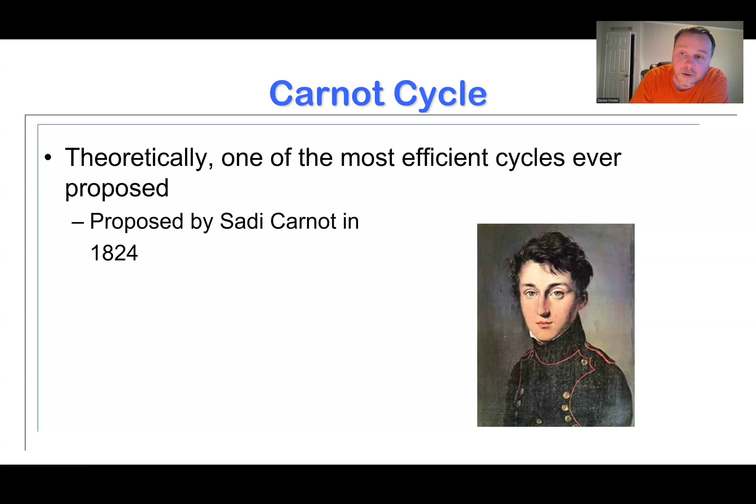I always like to show pictures of some of these individuals—thanks, Wikipedia, this is just a Wikipedia image. The terrible dad joke I always tell in class is I like to show these individuals so that when you're really cranking away at your homework, spending hours—if you're doing this right, not just letting AI or some service do your homework for you, if you're really wrestling with these problems—at some point you should be frustrated, thinking 'why did I choose to be an engineer?' Just don't hate me, I didn't do it, it's this guy, that guy right there, it's his fault, his fault, right? So when he is the source of your ire, not me, okay, I'm just the messenger. That's the guy, that's the guy. If I can get this mirror straight on the camera, I'll show you some of our good forefathers of thermodynamics. This is one of them, this is Nicolas Léonard Sadi Carnot. Let's talk about what he did. Why do we not like this guy?

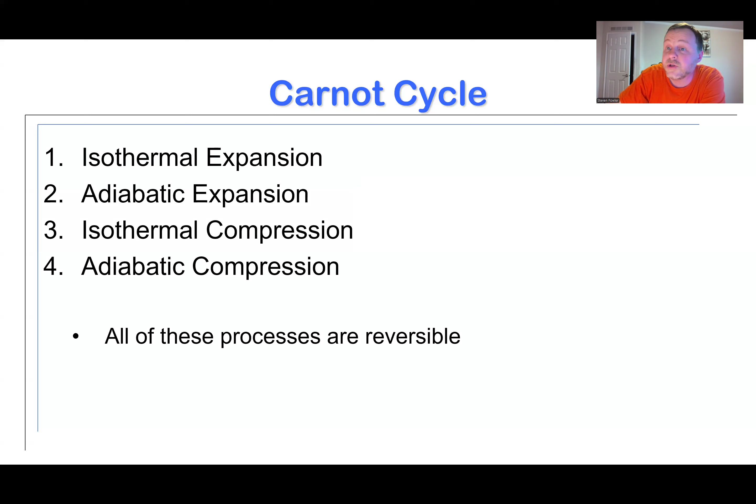Well, what am I going to do here? I'm going to talk about and show these processes graphically on a PV diagram in just a second. I guess I could draw it here, I'm going to just draw this on paper. Okay, so I'm going to stop sharing here and change video.

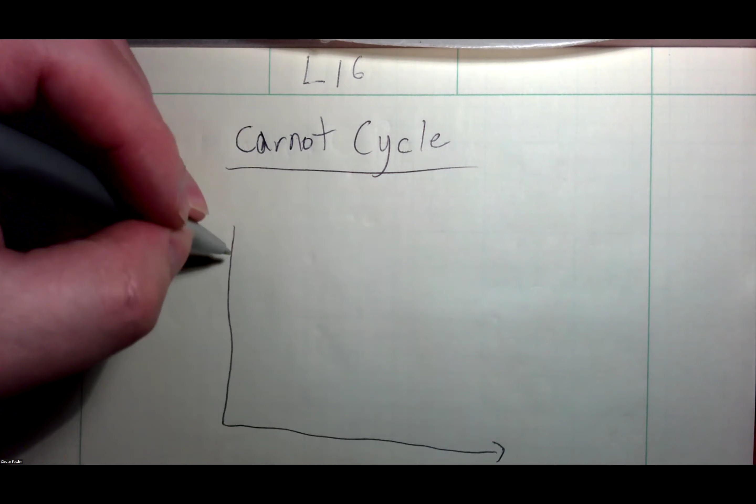Remember, before I stopped sharing screen, I said there are these four processes—I showed you the four processes for the Carnot cycle. Carnot proposed this process, and if we plot these on a PV diagram, pressure versus volume, he starts out with an isothermal expansion.

So we're going to go from a small volume at state one to a larger volume at state two.

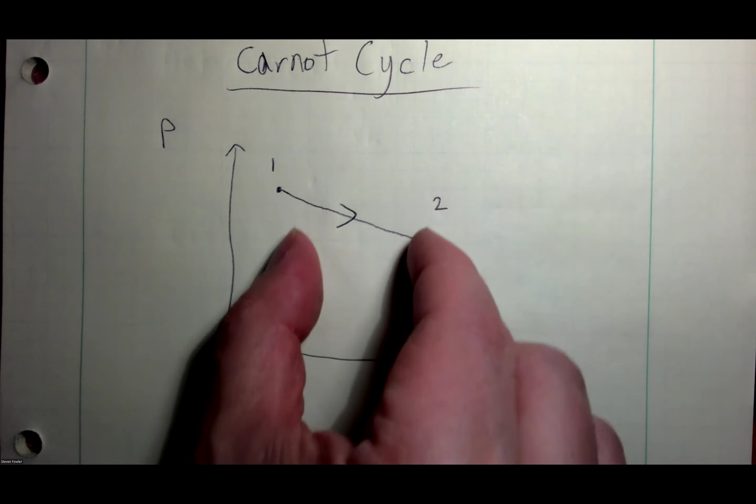Now, in class, I would stop and ask: what does this area under here represent? Who can tell me what this area under a PV curve represents? And people would say, well, that's potential work—that's the potential work we could get out of the system, right? Yes, that is potentially the work we could get out of this cycle.

Now, this process is isothermal expansion—isothermal meaning constant temperature—and that's occurring at a high temperature. So, a line of constant high temperature going across.

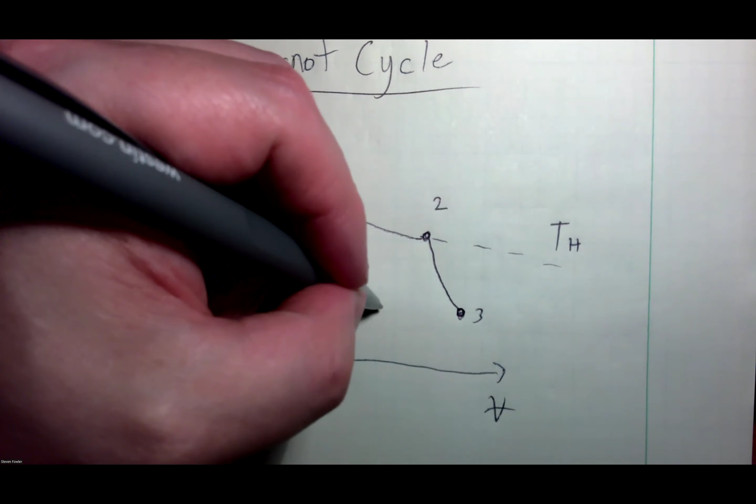And then after isothermal expansion, we go through another expansion—this would be adiabatic expansion. So if I basically supply enough heat to keep the temperature constant, but then stop supplying heat to get down here to state three, this process is going to end up going down to a line of lower temperature.

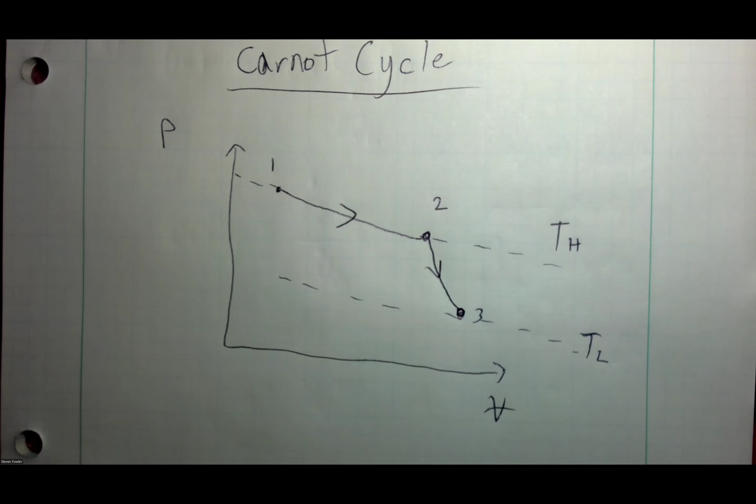And now, if I were in class, I guess I could do it here, I would do this on the board where I could erase these things. I'm going to do these in green—these lines are going to be all in green.

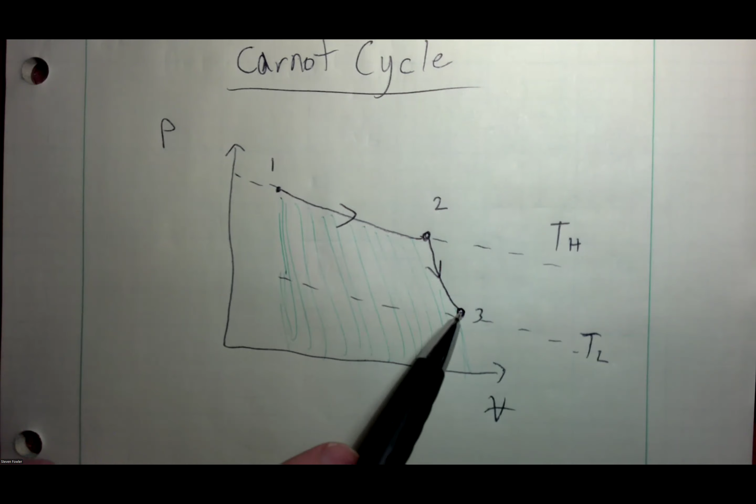This whole area underneath there represents potential work that we could remove from the system. Now, those are the expansion processes: isothermal expansion, adiabatic expansion. So from 2 to 3, I'm expanding, but I'm not allowing it to lose or gain heat.

By doing that, I end up dropping the pressure and dropping the temperature to get the expansion to occur. Now I go back along the line of constant temperature from 3 to 4, doing an isothermal compression. So this down here, that's compression.

Notice these areas up here, these are green. These are expansion, that's work out. This area here, that's work in, that has a negative sign. So this area under this curve gets subtracted.

And then to complete the cycle, I do an adiabatic compression. I compress the system, but I don't allow it to gain or lose any heat. By doing so, if I compress it adiabatically, it's going to end up increasing pressure and increasing temperature up there to the higher temperature. So all of this area down here gets removed.

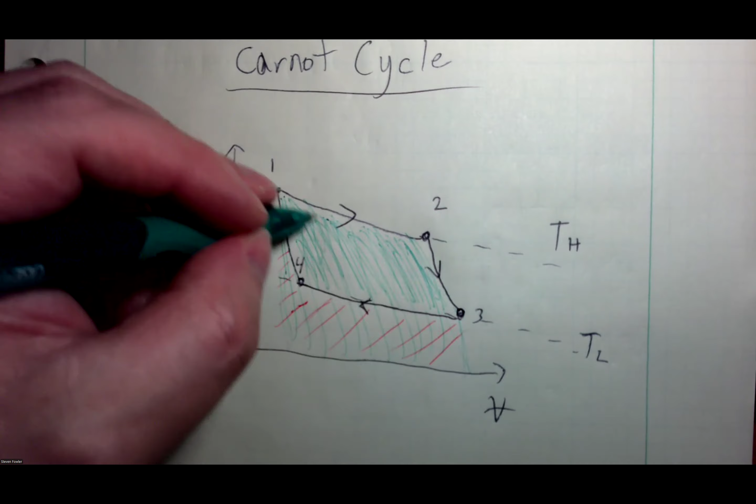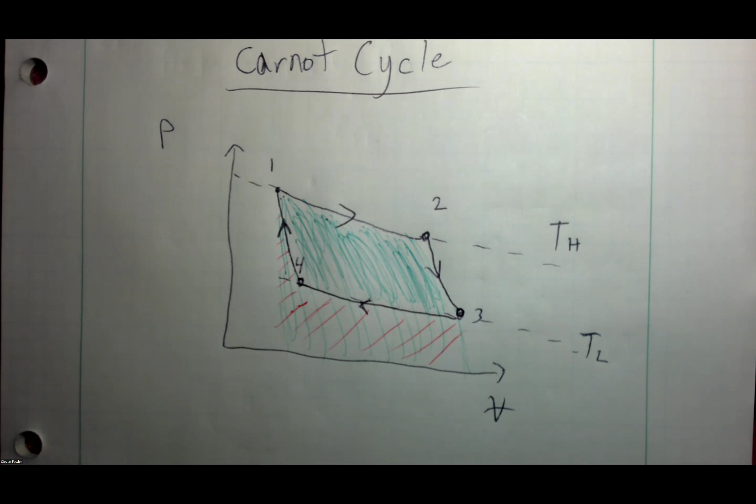What you have is this area bound by these curves. I'm going to color that all in green. And the area bound by those curves represents the potential work that can be extracted from this process. So again: expand isothermally, expand adiabatically, compress isothermally, compress adiabatically.

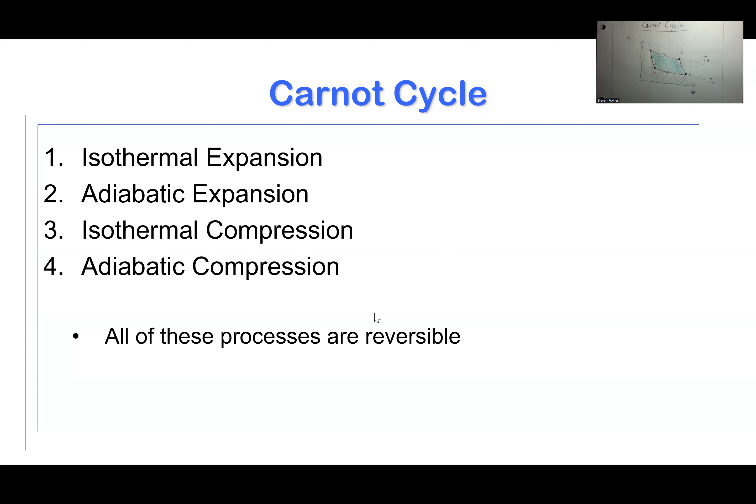And I've got this in kind of a graphic format, right? Expand isothermally from 1 to 2. I've drawn that up here. This is where most of the work in a heat engine can come from.

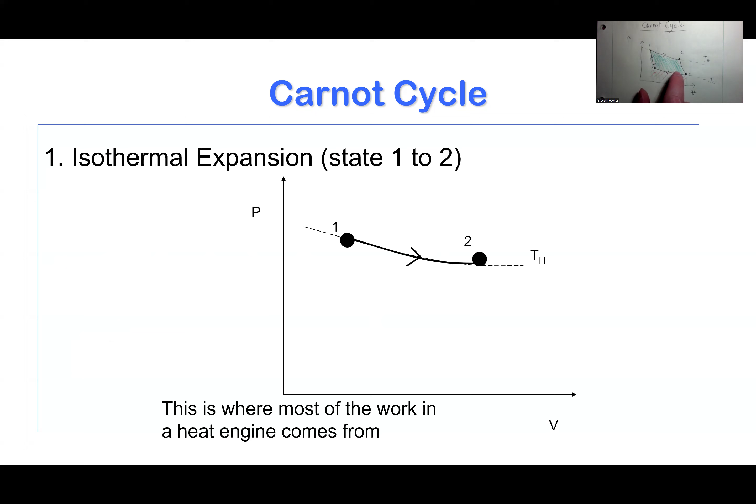Expand it adiabatically from 2 to 3. That's where the temperature drops to the lower temperature. We're going to compress it isothermally, meaning constant temperature, so we're going to go to a smaller volume along this line of low temperature.

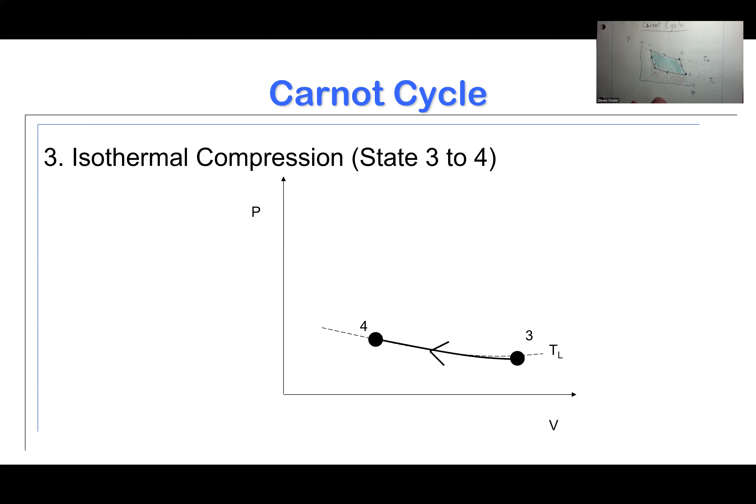This area under this curve is now negative. So I've got positive minus the negative, so that difference goes away. And then finally, to complete the cycle, adiabatic compression, get back up to the initial state.

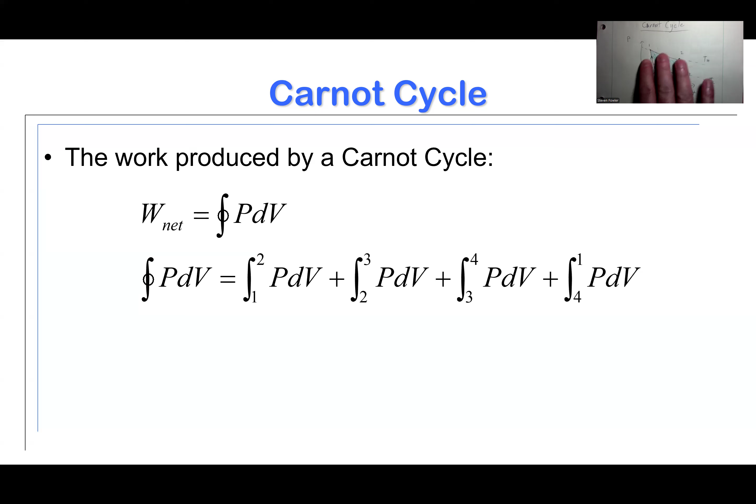So why do I draw this and do all the coloring? Because notice the process here - the net work, and this is what we call a cyclic integral. I know sometimes we call this a line integral, but what this means is this is an integral that is along a curve, and in this case, that curve has limits, the same final and initial limit on this integral.

So it's going from an initial state all the way around back to that initial state. Notice the sign on each of these integrals: the expansion from state 1 to 2, that's positive. The expansion from state 2 to 3, that's positive. The compression from state 3 to 4, that's negative. From state 4 back to 1, that's negative. So positive, positive, negative, negative.

An integral is, for us as engineers, just the sum of a bunch of little tiny pieces. When we add up all the little tiny pieces that comprise the cycle to get from here all the way back around to there, we end up with the area bound by these curves.

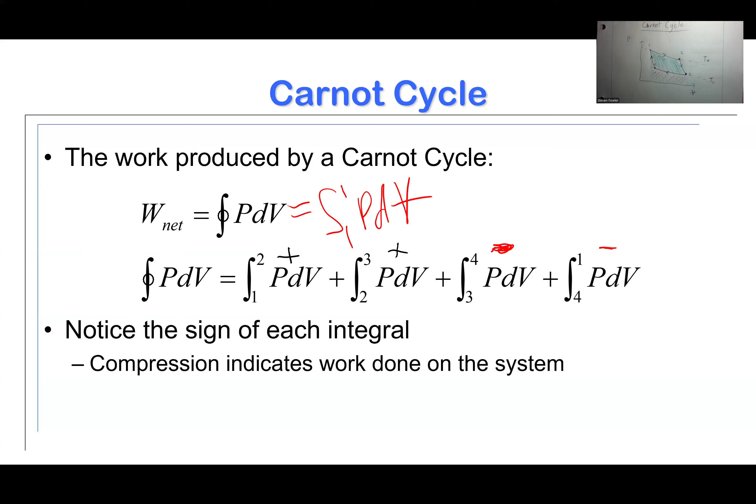So again, negative sign, the compression indicates work done on the system - that's negative work out. And so you see here, heat is being transferred from 1 to 2, and it's adiabatic from 2 to 3, so no heat transfer from 2 to 3. Then it's isothermal, so heat is being lost from 3 to 4 while it's being compressed, and then no heat transfer occurring from 4 back up to 1. The area bound by this curve represents the net work that we can get out of this cycle.

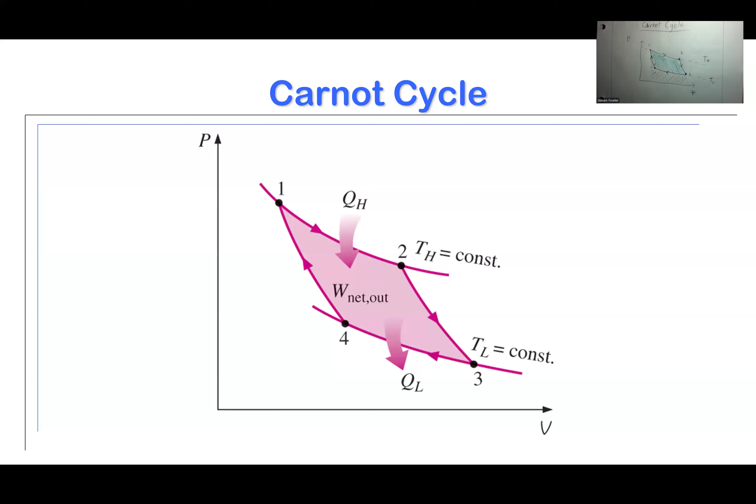This is a terrible scan from our textbook. I need to get a better scan of this. You could probably Google Carnot cycle diagram and get a much better image. But we don't really have an engine that operates in anything like a Carnot cycle.

The closest we could do is maybe pretend to take an insulated piston cylinder and remove the insulation at the end of it, expose it to a high temperature heat source, allow it to expand at a constant temperature, and then insulate it and allow it to continue to expand, getting it down to a lower temperature. Then remove the insulation, expose it to a cooling sink, a low temperature sink, so it can reject the heat that is not extracted through the expansion process.

Get it back to go ahead and compress a little bit. As it cools down, it shrinks, and then insulate it and continue compressing it, getting it back all the way up to state 1.

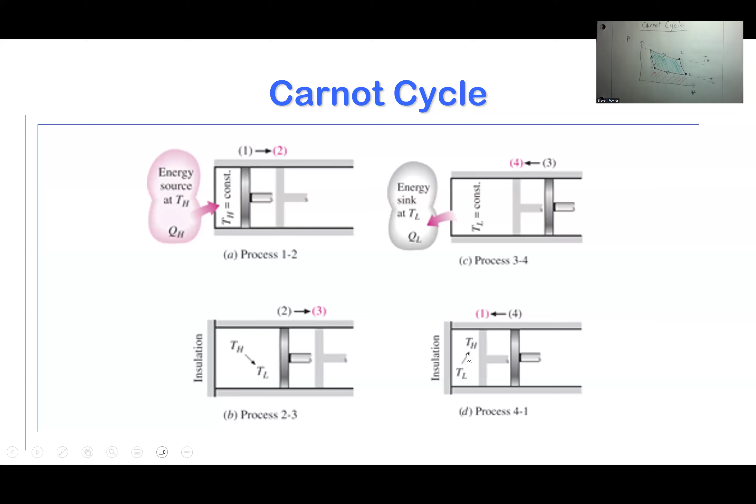Again, we don't really have a device that does this per se, that I can point to and say, oh, this is a real world version of a Carnot cycle. But that doesn't mean that we don't use it, or didn't use it, as a foundation for other very, very important things.

Carnot, when he proposed this, said, hey, what if we did all these cycles in a reversible fashion? Well, for one, if they're all reversible, that means we could run this thing back in reverse. And if I run it in reverse, now I'm moving heat from a low temperature body, putting some work in, and pushing heat to a high temperature body.

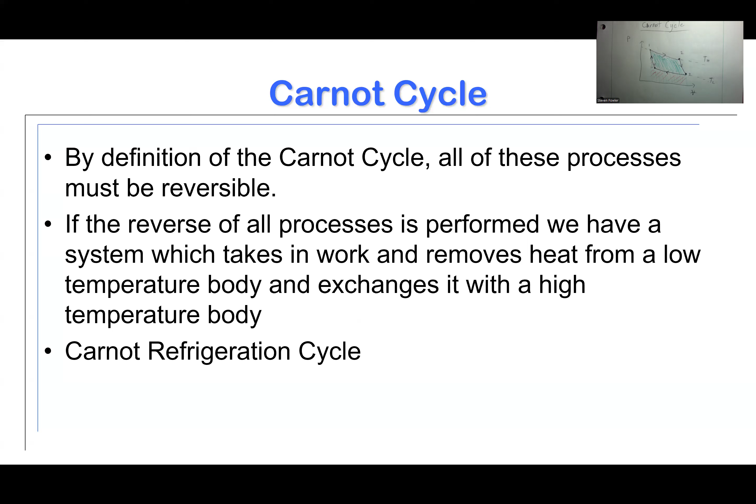If I run an engine in reverse, that's essentially a refrigerator. Running an engine in reverse is essentially a refrigerator. And since the Carnot cycle is reversible - by definition of the Carnot cycle, it is reversible - if I run that reversible cycle in reverse, now I get a refrigeration cycle, where I put work in, the work bound by this curve going in reverse, and now the heat is moving in the opposite direction. Now I'm removing heat at the low temperature, and pushing heat out at the higher temperature.

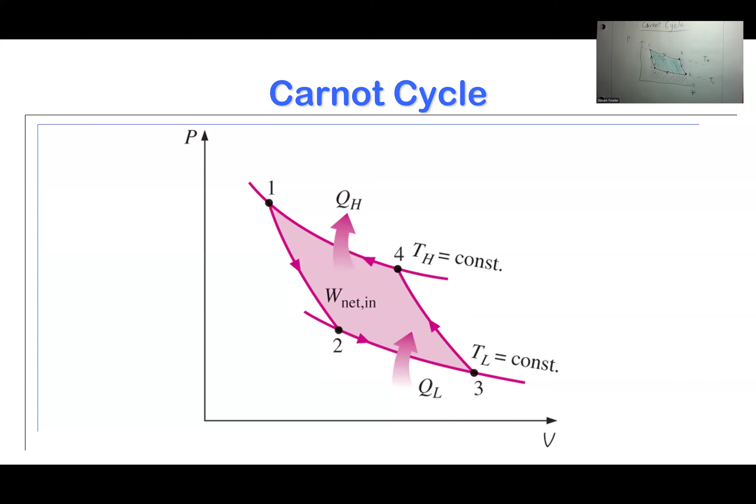So all that to say, the Carnot cycle can be applied to a heat engine, it can be applied to a refrigerator, it can be applied to a heat pump, because a heat pump is basically a specifically applied version of a refrigerator. So that's one principle that comes out of this - the fact that it's reversible, I can reverse it, and that essentially behaves like a refrigeration cycle.

Two other really important principles come out of this, and this is then used by others after Carnot to really form and flesh out what becomes the second law of thermodynamics, Clausius being one of the main ones here. The two principles that go on to influence later work: one, the efficiency of an irreversible heat engine is always less than the efficiency of a reversible one if it's operating between the same two reservoirs.

So what we find through Carnot's work is that what really drives this is the temperature of the high temperature source pushing QH into the system, and the temperature of the low temperature sink where the heat is getting rejected. These are the two factors that determine the efficiency of the Carnot cycle, or any other reversible cycle. That's number two.

The efficiency of any reversible engine operating between the same two reservoirs, one at TH, the other at TL, all reversible engines will have the same efficiency - the maximum efficiency, which is higher than any real or irreversible heat engine. So this sets a limit. We talked earlier about the reversible process being considered the theoretical limit. We cannot construct a heat engine more efficient than the Carnot heat engine; all reversible heat engines operate at the same maximum efficiency.